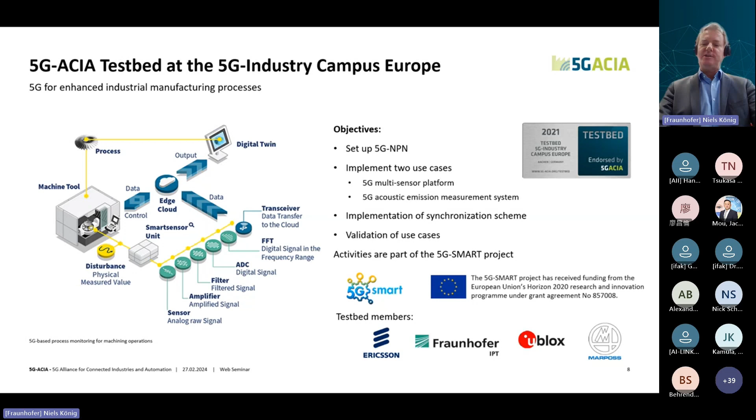And with that, we started in 2021 already, and the testbed is finished, so all the results are there. The testbed members are Ericsson, Fraunhofer IPT, u-blox, from which we tested a very special chip for generating accurate timestamps, and Marposs, which is a sensor company from Italy.

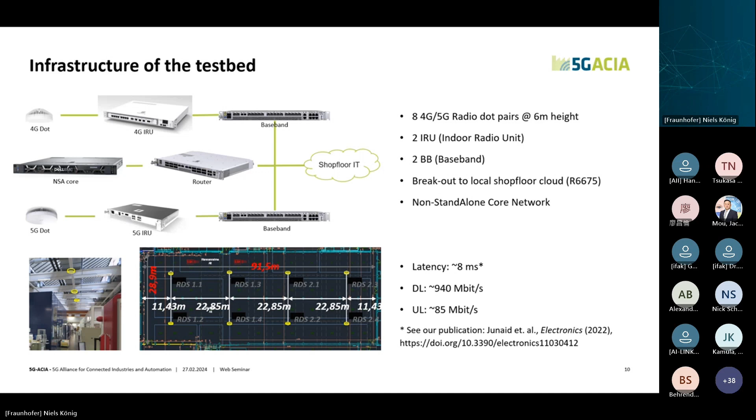Okay, thank you, Niklas. I hope you can hear me and see me. So we are now here in the area. I'd like to show you 2 sensor systems which we developed in the 5G-ACIA endorsed testbed.

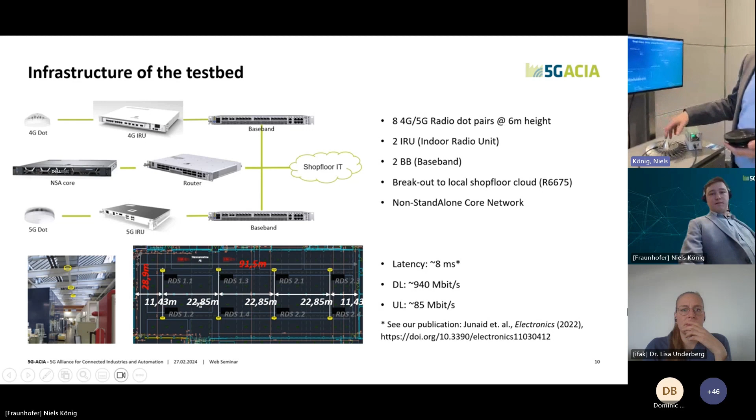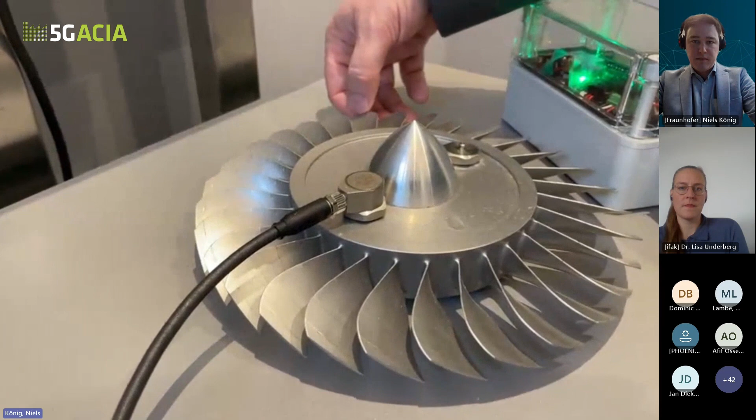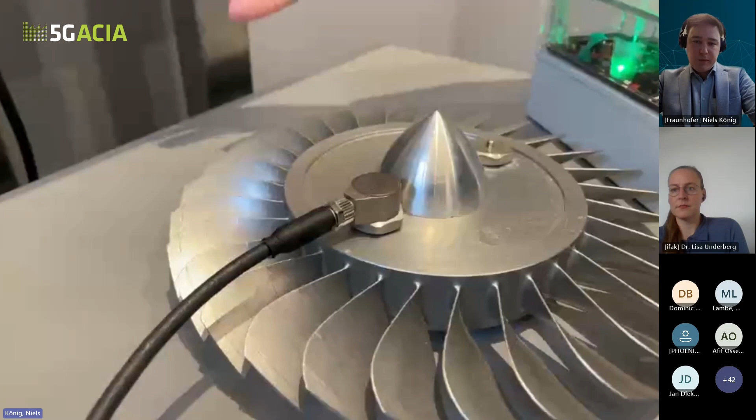The first one is the multi-sensor platform, where we have the capability of measuring different physical quantities like acceleration, temperature, and strain, for instance. Here we have one accelerometer, a piezo-based element which we can fit inside the machine. Typically we position it at the clamping device of the machine, and this accelerometer can capture any vibration that is coming from the machining process. Then we have a small box containing some PCBs.

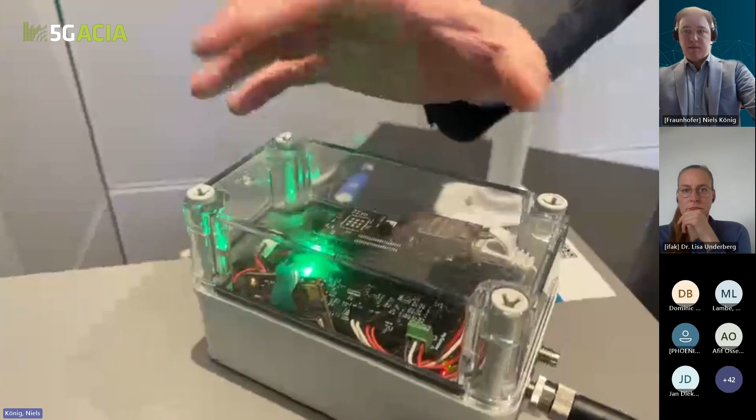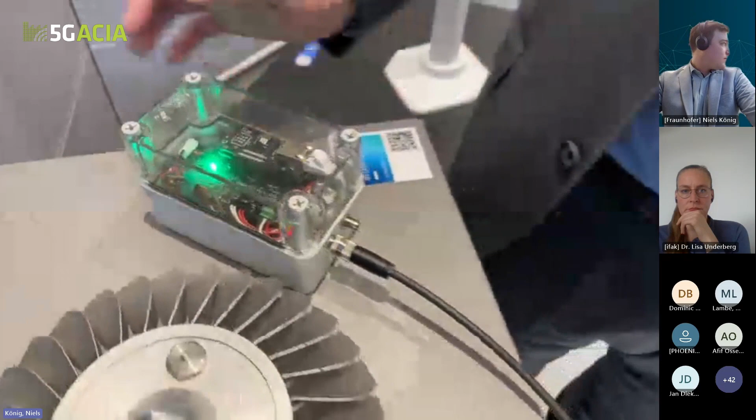One PCB is a microcontroller board. The other one is for acquiring the sensor data, and below that is also a 5G UE and the battery pack. So this box would be typically running inside the 5-axis milling machine.

So now if we have any kind of physical events happening, like vibration induced by the milling tool on the workpiece, then we can actually record this, send it via the 5G link. From the 5G system, the 5G core network has a user plane function, so the data can be routed into the cabled network, the local area network which we have on the shop floor.

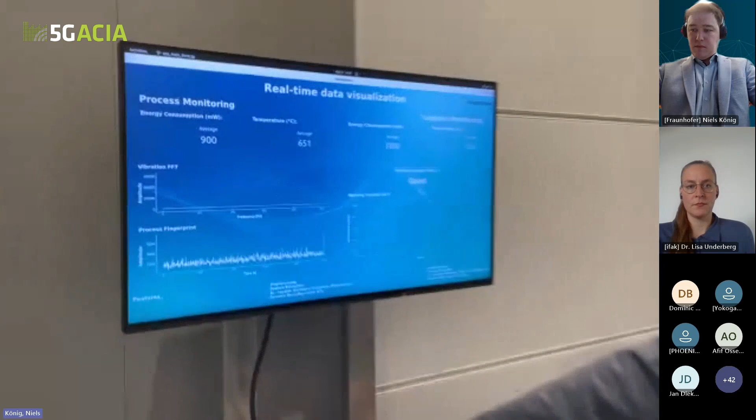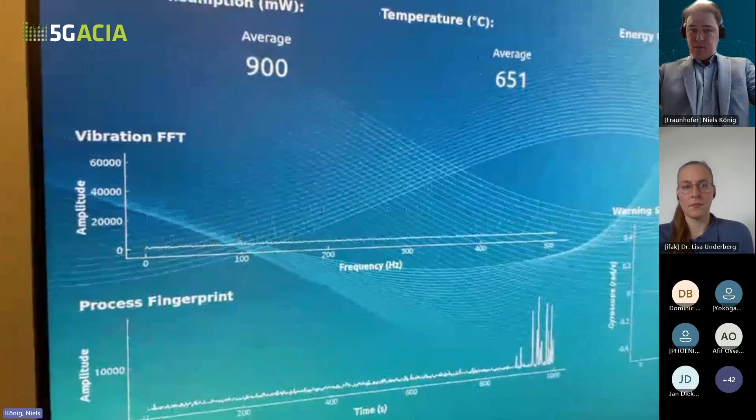And we have a small PC that is receiving this kind of data stream and plotting it here on the screen. So now if I induce any noise or vibration on this device, you are able to see it, and you may hear it as well because we disabled the noise cancelling. You can see the reaction is really quick. So here you see this vibration spectrum.

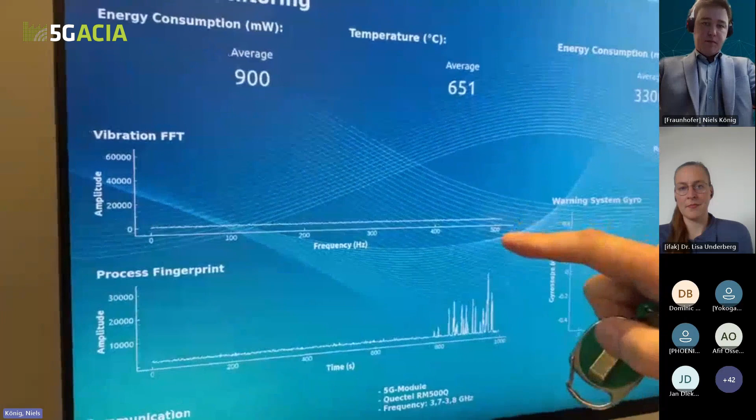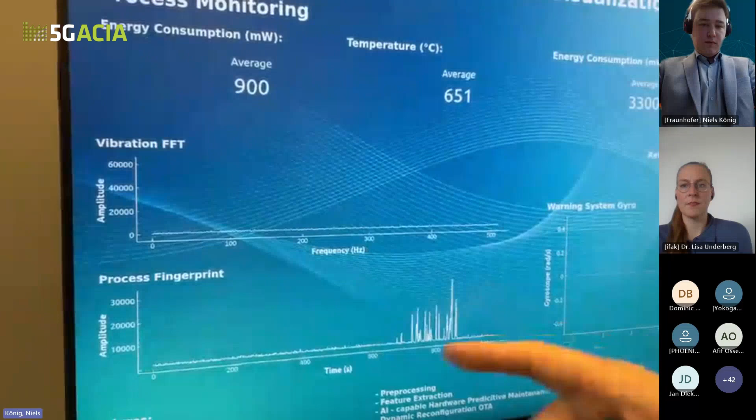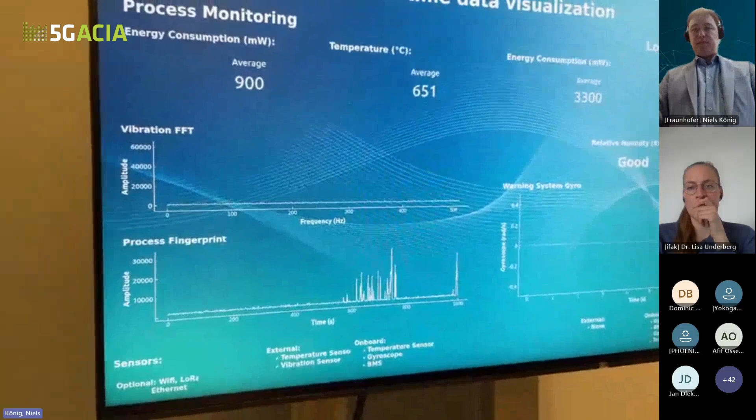So the sensor box is doing the Fourier transformation calculation, and we see the amplitude over frequency, and then we see a time series of the vibration amplitude where you can detect if anything happened at all. It's also important to understand what is the machining time and where there's no machining time.

So this kind of platform can be used to record all the sensor data during the machining process. And if we synchronize the machining data, like the positions of the machine, the milling tool for instance, then we can synchronize the sensor data with the position data and create, for instance, a digital twin where you can map the vibration amplitudes over the geometry of the part.

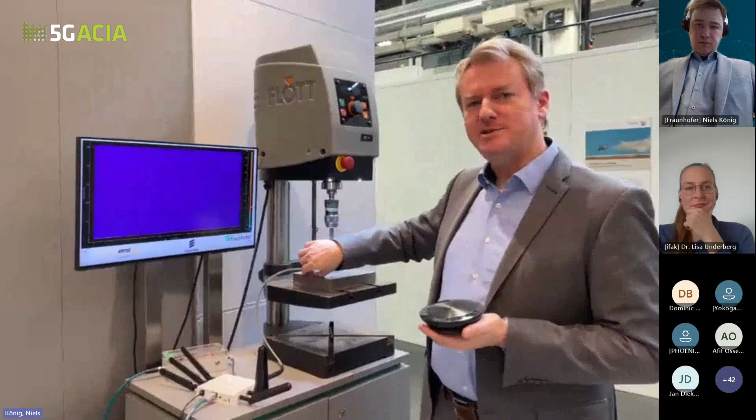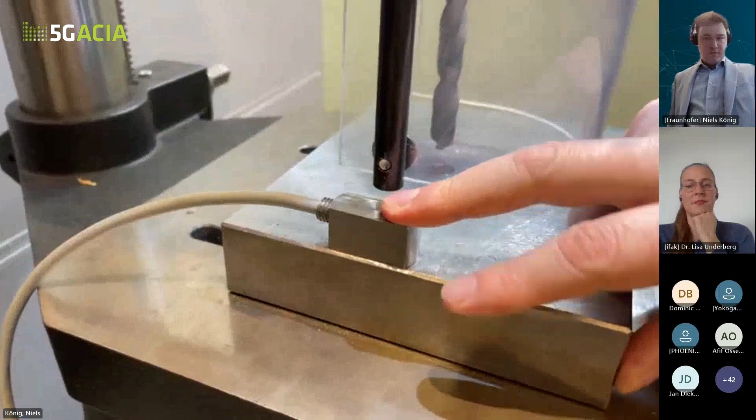But we have another sensor system which I'd also like to show you. In theory it's quite comparable, very similar. Also here we have a piezo element, but now we are interrogating this kind of sensor with a very high sampling rate, 1 megahertz. Before that we had 20 kilohertz.

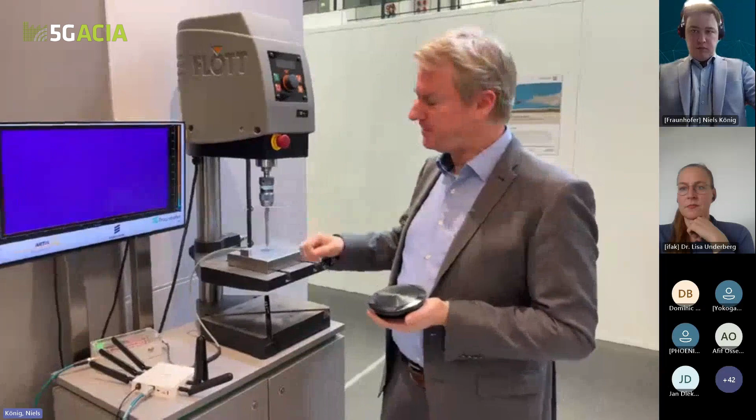So now we are in the range of so-called acoustic emission, which is actually an acoustic fingerprint recording of the solid body. As soon as we have any physical contact between metal and metal, then we can measure it. And this kind of interaction, of course, we have between the tool and the workpiece.

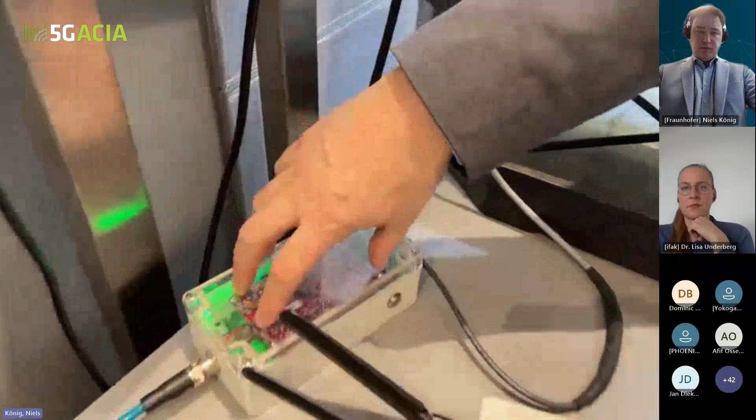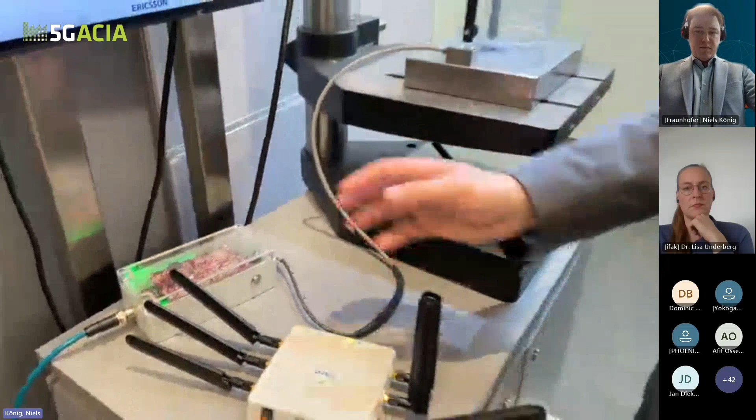Again, here we have some electronics for the signal preconditioning, and there's an FPGA for the signal processing because we have a high computation load due to the high sampling rate. And then again we have a 5G user equipment, which in our case is an external device, but it could also be an integrated device. It doesn't play a role, it's just a different form factor. In both cases we have Ethernet as an interface between the sensor board and the UE.

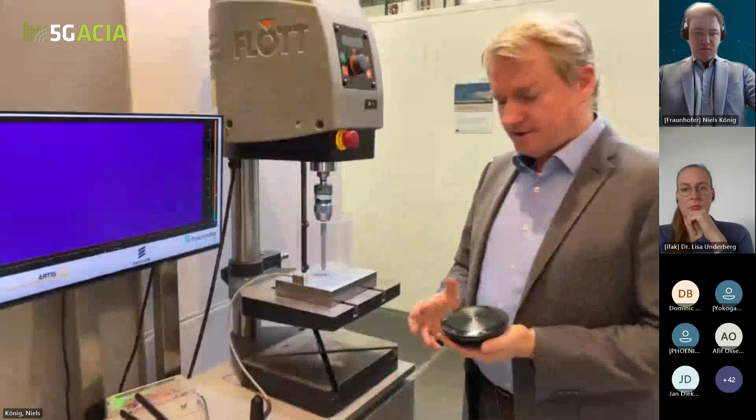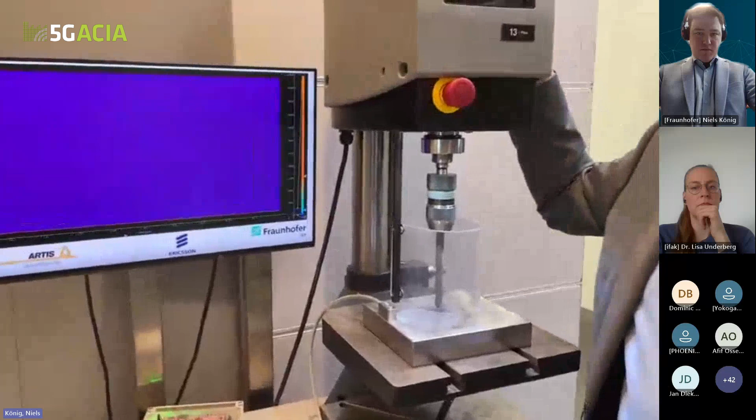So now if I generate some physical contact - now we have a drill, an old drill, which is artificially worn out. And if we have the physical contact, you can see in the waterfall plot, on the y-axis we have the spectrum, and on the x-axis we have time. So you can see each acoustic fingerprint of each cutting edge.

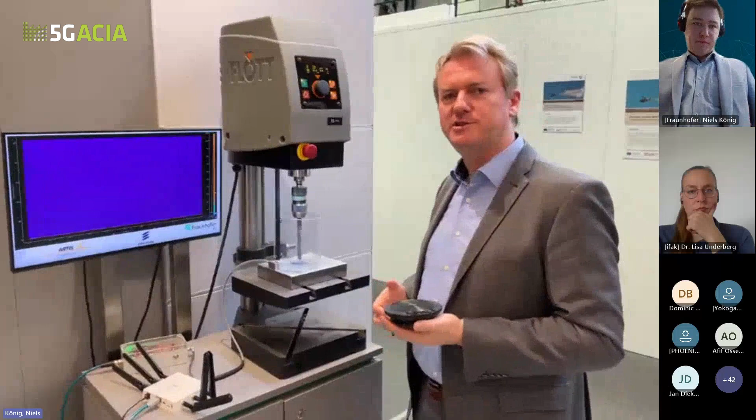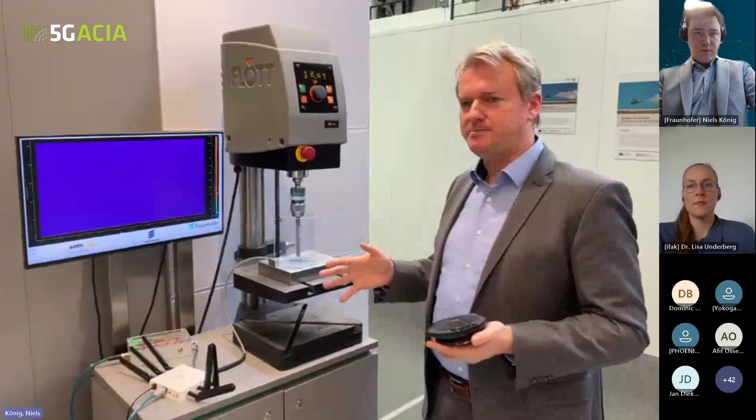This acoustic fingerprint could be utilized to train a model for wear, and wear is actually a cost factor, so it's attractive to monitor this kind of condition in real time. So, a wireless sensor system - why a wireless sensor system? It's beneficial because you can easily retrofit this kind of sensor system, put it inside the machine to do your trial, and then take it out and go to your next machine.

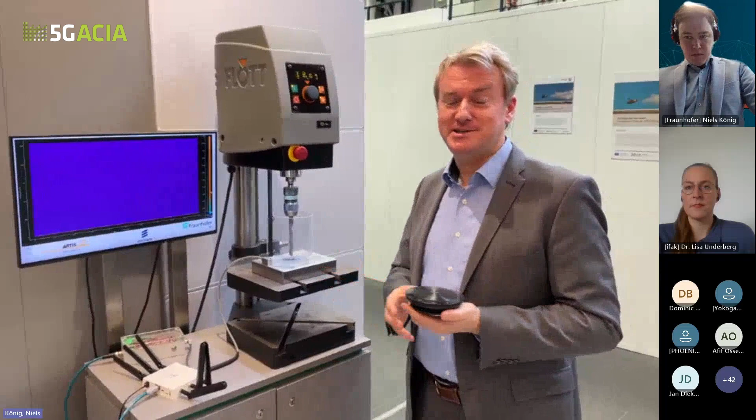So I hope this was interesting to you, and that's it from my side. Waiting for your questions in the chat. Thank you.

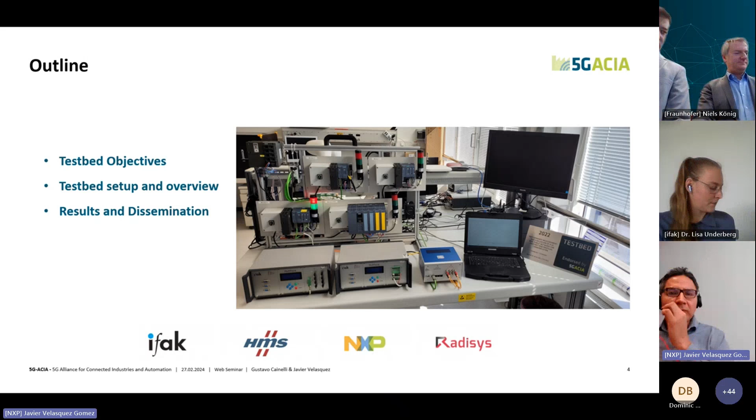So the members of the testbed, all of them are part of 5G-ACIA: ifak Institute from Germany, HMS Networks, NXP Germany, and Radisys.

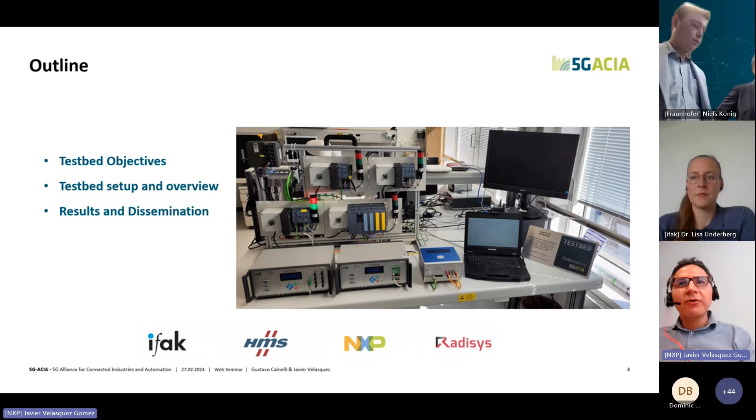Before continuing, the first step would be to explain why we decided to do this analysis of PROFINET over 5G. We consider that functional safe wireless communication can be widely used in industrial automation. And the other point is that PROFINET and PROFIsafe are very popular protocols for real-time communication and safety applications in industry.

Considering these two big topics, we asked ourselves a set of questions that will be addressed in this presentation. However, before jumping there, we have another set of questions about the relevance of these technologies for safety-based communication in your business.

So how relevant is it for your business to enable or implement fail-safe automation solutions? Is it relevant, not that much, or maybe you don't know?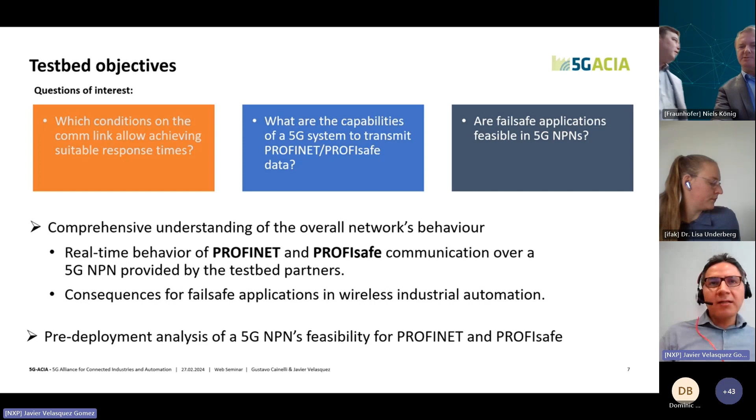So based on that, we got our testbed prepared and endorsed by 5G-ACIA almost 2 years ago. This was approved with the general objective of measuring the performance and evaluating a 5G non-public network for PROFINET and PROFIsafe communication.

To achieve this implementation, each of the members of the testbed contributed with some of the parts. For measurement and evaluation, ifak is doing its part, providing some of the equipment for measurement and also providing the experience and expertise in the analysis of network and industrial communications.

The 5G network is provided by NXP and Radisys, a combination of hardware and software provision. And for enabling the PROFIsafe communication over the 5G network, we are using technologies from HMS, which essentially provided the devices for tunneling the traffic through the network.

So here on the schematic overview on your right, you see the different components of the network in this simplified layout. And at the bottom, you see the measurement equipment.

It is the Multiface devices by ifak, which allowed emulating and injecting different types of traffic, in this case PROFINET traffic, into the system to be measured, and also provides the capability of really accurate time-wise measurements with granularity even of microseconds.

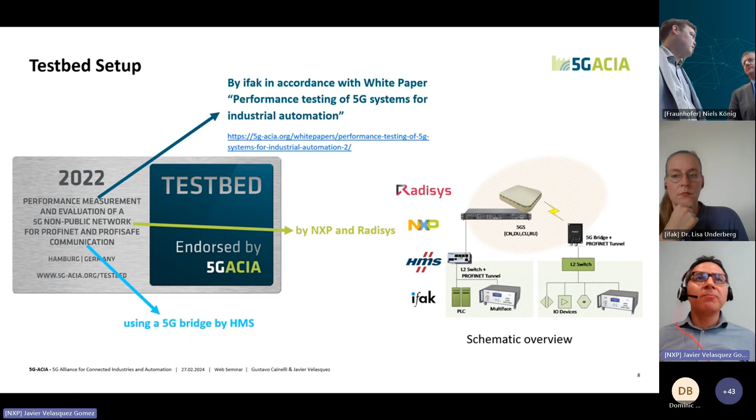So here is maybe a little more simple and meaningful for all of you to understand how this was implemented. So we have two end devices performing PROFINET communication. We have on the top the PLC, which is the PROFINET controller, and at the bottom the PROFINET input-output device. And in between, of course, we have our 5G network.

However, to enable this layer 2 communication over a 5G link, which is IP based, we need to tunnel, or wrap, the PROFINET protocol to make it go through without any inconvenience. And that's achieved with the components signaled here as PROFINET gateway and wireless bridge for 5G.

Right next to the PROFINET devices. So the objective, and the essence of these two devices, is to create this wrapping of the communication. And of course, in the end, we have our measurement devices, which are in charge of evaluating the different test groups.

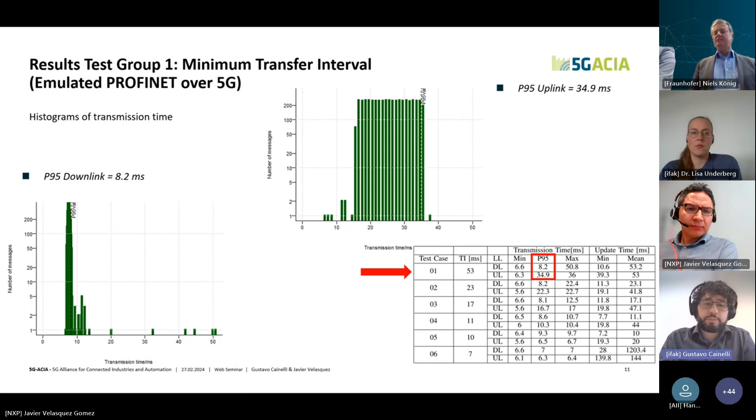For uplink, we have a value a little bit higher, that is 34.9 milliseconds. And this difference is expected because we have a TDD ratio of 4 time slots for downlink and 1 for uplink, so we expected that we would have this difference.

Can we go to the next one, please? Yeah, so the second test group, then we evaluated PROFINET and PROFIsafe over 5G. And in this test group, we have 2 test cases: one is a wired connection, and another one is a wireless connection.

So in this case, our test system acts a little bit different. We have one multiface acting as a traffic generator, giving inputs to the PLC. And these inputs are sent to the PROFINET I/O device or the PROFIsafe I/O device. And next, please.

Then we use another of our multifaces to monitor the traffic. In this case, the multiface is monitoring the PROFINET traffic. We see here in this switch, there is a switch with port mirroring, which means that all messages that the PROFINET I/O device, the PROFIsafe I/O device, this yellow one at the bottom, all the messages that this device receives, the multiface also receives. The multiface can open this frame and analyze all the fields and see if the message that left the controller arrived correctly to the device, and what is the transmission time, the latency for that.

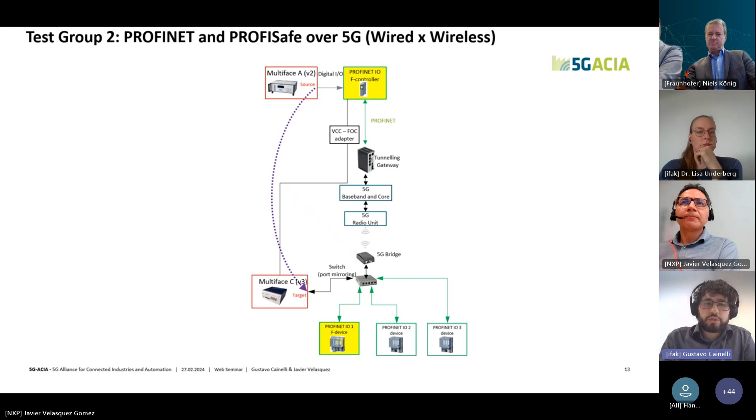We did that using a cable, and without a cable, using the wireless communication system. I want to show you the results in the next slide of this comparison. For this comparison, we bring two charts showing the transmission time histograms for uplink and downlink. On the left-hand side, you see the wired connection, and on the right-hand side, the wireless connection.

You see that for the wireless one, the distribution shows a shift to the right-hand side, which is also expected. It's a delay added by the communication system. This distribution, even for wired connection, is a bit wide because the multiface is also considering the communication cycle of PROFINET, which means that all the inputs that the controller received are sent to the PROFINET IO device only every communication cycle of PROFINET.

In this case, it was 32 milliseconds, the communication cycle. On the right-hand side, you see the histogram for the wireless one, and the distribution is quite similar. There is this shift to the right, according to the delay of the 5G system, but there are also some outliers. These outliers are something that must be investigated because this may cause issues to the PROFINET system.

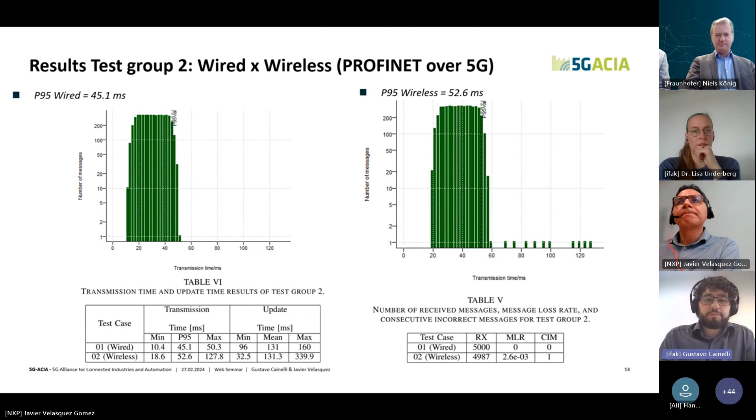Can you go to the next one, please, Javier? Is it this one? No. Yeah, this is the... can you? Sorry, I think I had a connection issue, but I think you hear me now, right?

Yes, okay. So I was saying that we tested these two test groups, and we also exhibited our test bed in many conferences and fairs, as you see here, for example Hannover Messe, Chicago, also the 5G Industrial Days in Taipei last year, and also in some scientific conferences, as you see here, our colleague Harsha at ETFA last year in Romania.

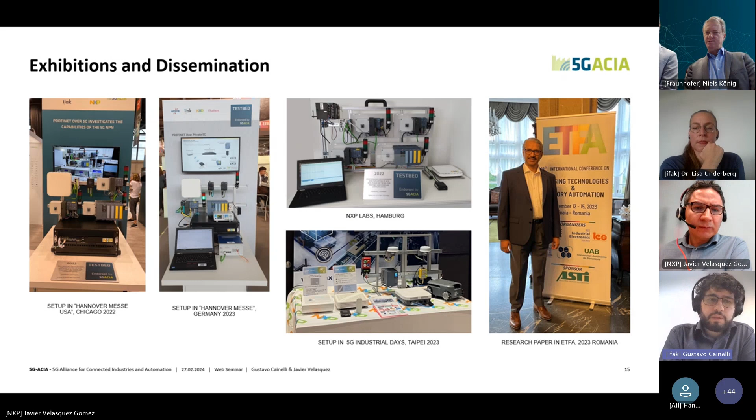In these fairs and conferences, we got some feedback from specialists and interested people about the topic. Now we have another poll to get feedback from your side. So, do you think wireless communication technologies are mature enough to support safety critical industrial automation?

Interesting result. We have 44% that say it's partially, and 36% that say yes. So it's an interesting result.

And I would agree with you, I would say yes. But of course there are still some challenges that need to be investigated, and this is one of the objectives of our test bed: to investigate these challenges and check if 5G or other wireless communication systems can really cope with this kind of safety application. For this reason, I would like to highlight the importance of performance testing, as we are conducting here.